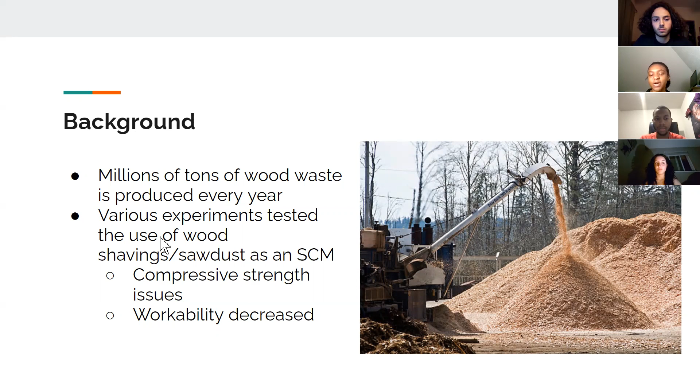Before conducting any tests ourselves, we familiarized ourselves with the experiments other people did to determine how wood would affect the properties of the concrete. The main issues that resulted were that the wood decreased workability and replacements greater than 8% led to compressive strength issues. All of this research led to our final hypothesis that the 5% wood mix would be more durable but weaker and less workable than a control mix without wooden fine aggregates.

All right, I think the audience heard enough of my voice, so I'll pass it to Sean to talk about our materials and testing methods.

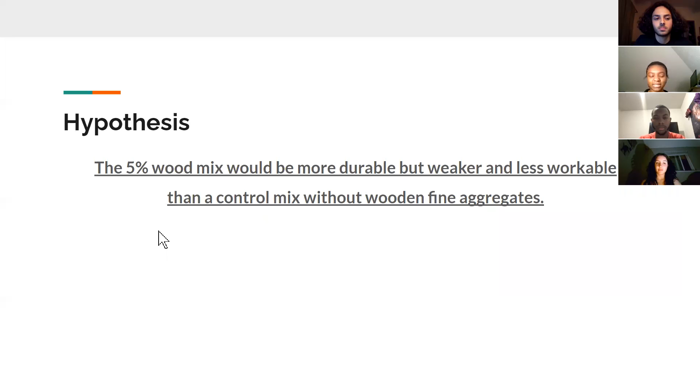So for our experiment, we created two concrete mixes, mix one, our control mix, and mix two. The ingredients for mix one were Portland cement or Quikrete number 57 pea gravel, which was the coarse aggregate, concrete sand, which was the fine aggregate, and water. The ingredients for mix two were the same as mix one, except for the addition of wood shavings.

After gathering all the ingredients, we mixed them together until we had a homogeneous mix. And then we performed the slump test, which looks at the workability of the mix. And we performed the pressure method air content test, which looks at the entrained air in the mix. Both mixes were then put into 3 4x8 cylinder molds to set and cure for a total of 7 days.

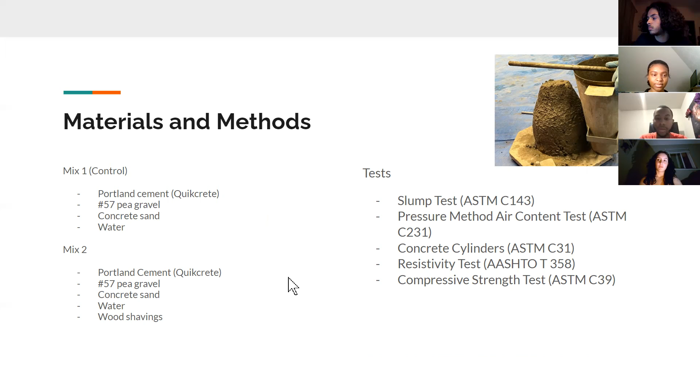After retrieving the cylinders, we performed the last two tests, the resistivity test, which looks at the durability of concrete with respect to corrosion, and the compressive strength test, which looks at the overall strength of the concrete. And here is a picture of us preparing the cylinders for the resistivity test. As you can see in the picture, we wrap the cylinders in damp paper towels in order to keep the surface more moist before starting the test.

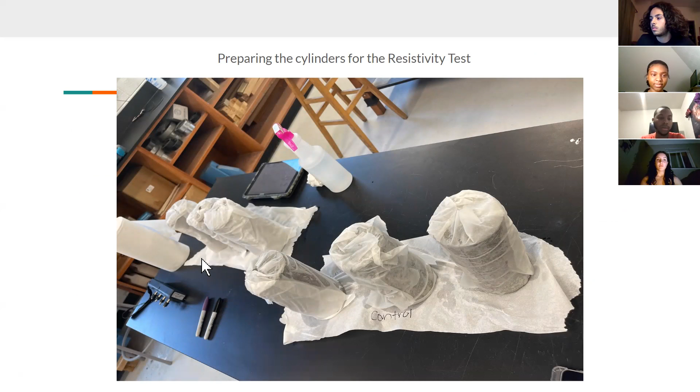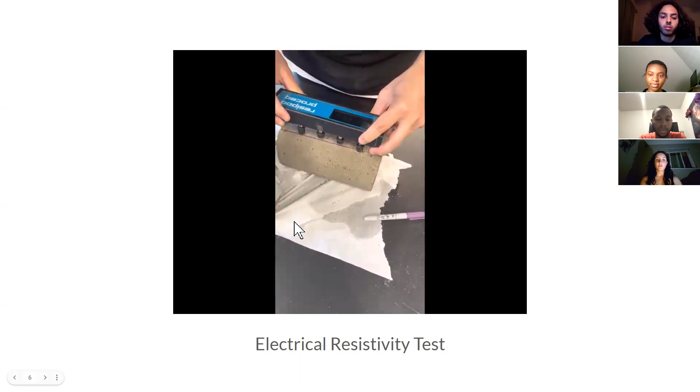So here is a video of the electrical resistivity tests that we conducted. As you can see, the prongs of the resistivity meter are lined up with the straight quadrant lines that were drawn on the cylinder. This allowed us to measure 4 different points on the cylinder.

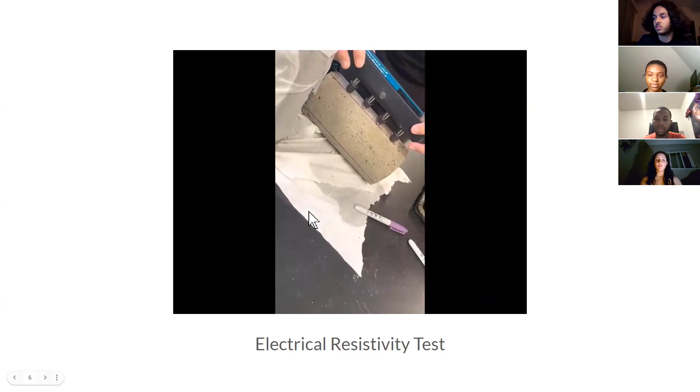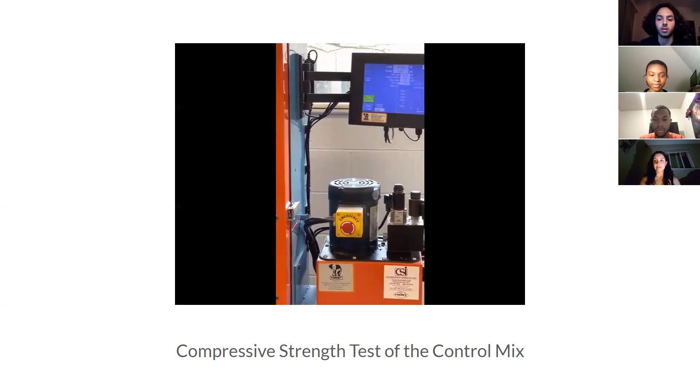And this is a video of the compressive strength tests for the control mix. In this video, the compression machine is gradually increasing the load on the cylinder until it reaches a max load right before fracture. About 2/3 of the way through this video, you'd see right about now that the cylinder starts to crack at its max load, and you can see that it's broken in multiple areas.

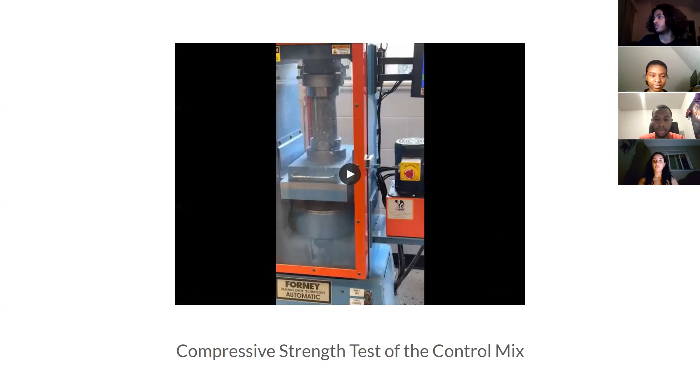All right, Alyssa, can you tell us more about the results of the experiment? Yes, I can. So for the results of the experiment, as you can see in the figure on the right, the control mix samples had a greater resistivity than the 5% wood mix samples. This alludes to that the 5% wood mixture was more resistant to conductivity, and therefore that alluded to as well that it had a higher durability.

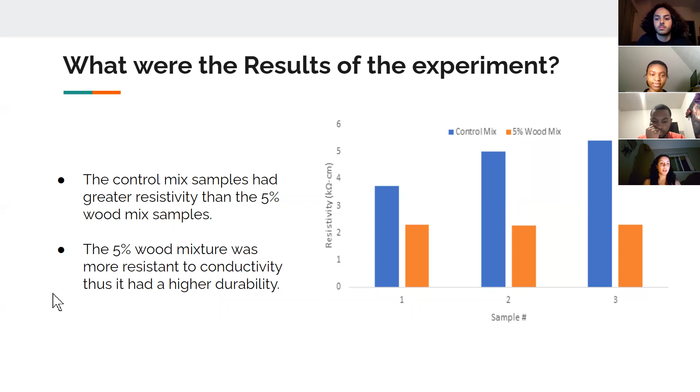In the next slide, you can see some photos of what the cylinders looked like post-compression. So for the first two that you see on the left, the 5% mixture showed a certain degree of post-compression fractures. And then for this last photo on the right, the control cylinder post-compression, you can see a lot of the voids that we noticed within the cylinder before the compression, and then the fracture point at the bottom.

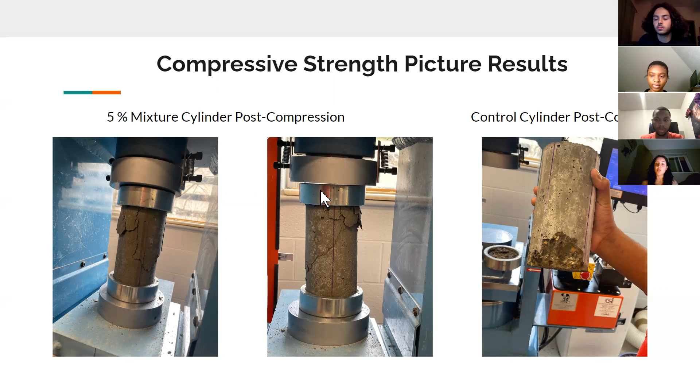All right, and how did the results compare to our hypothesis? Yeah, so as per the hypothesis, the 5% wood mix was indeed more durable, but less workable than the control mix without the wooden fine aggregates. And the 5% wood mix was too unworkable and required more water.

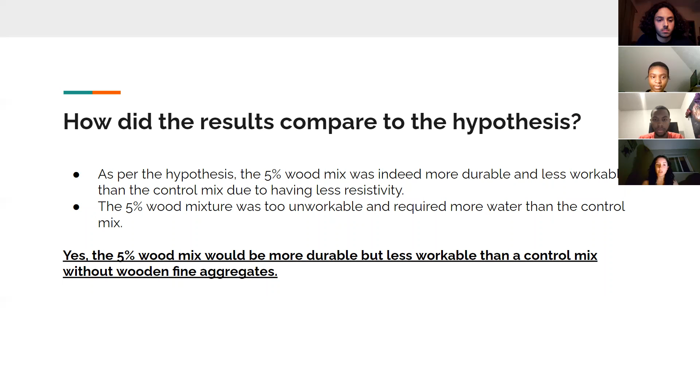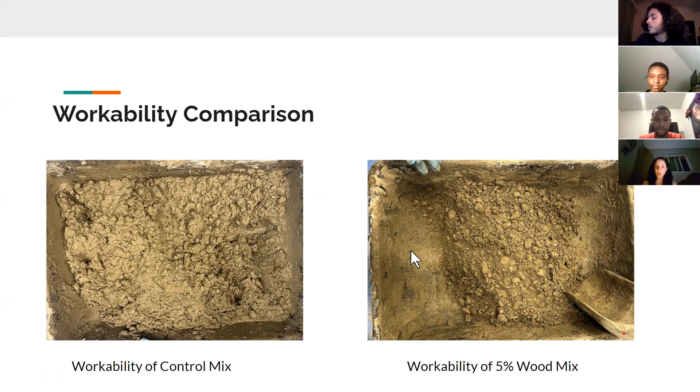And you could see this in the next slide when you compare the workability of the control mix and the 5% wood mix. If you can scroll to the next one. Yeah, so the one on the left, it was pretty workable and, you know, needed a bit more mixing in terms of, in retrospect, the voids that we saw in the cylinders, but the one on the right without the water added for the 5% wood mix, it was completely unworkable. It was hard to kind of get it to coagulate fully.

Sanjay, can you tell us more about what our results tell us? Yeah, so our results, we looked at workability, and the loss of workability in the wood mix is mainly due to the increase in friction between the wood particles, rocks, and sand. This resistance is created when acting surfaces are rubbing up against each other, which then cause the mixture to lose its flowiness. We then looked at the electrical resistivity test, and it relates how easily ions can move around inside the concrete.

And this lower resistivity in the 5% wood mix meant that the ions struggled to move around in the mixture, making it more durable. Both samples, in fact, allowed a high penetrability level of chloride ions, but the 5% wood mixture was slightly less than the base mix. Since the ions were not able to move as freely in the wood mixture, the concrete cylinder showed an increased resistivity, which directly correlates to an increased durability.

When we talk about durability, it means that this concrete cylinder will be able to perform and withhold the properties of the design over a longer period of time and under harsher conditions. Our experiment results, we were limited on time, and we also struggled to get the mix weights in order. So it was tough to get a third mixture or a fourth mixture with higher wood percentages into molds.

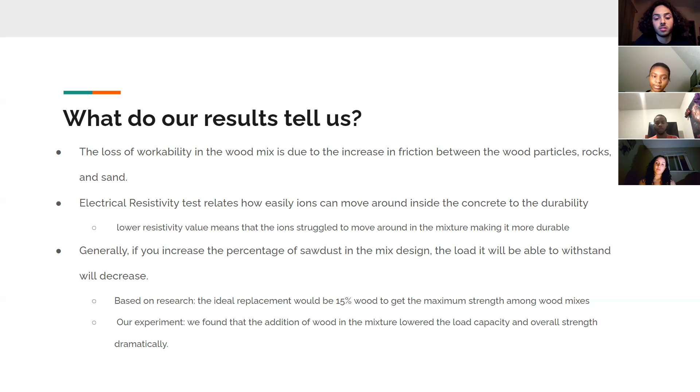It would have been nice to test a 2.5, 5, 7.5, and 10% mix to determine which would perform the best. According to some research that our group did, the ideal replacement would be 15% wood to get maximum strength among the wood mixes, but less than an 8% addition of wood would be the most ideal for retaining all the important properties of the mix, and that would ensure an increase in durability, but decreased workability and compressive strength.

And how can we apply everything that we learned to the construction world? So potential mass use of wood additives in our concrete mix relies on a few factors. So using wood as a substitute for a fine aggregate will limit the need for excessive extraction of natural rocks. Using recycled aggregate would also cost a bit more, but it would lessen the mass transportation of aggregates, and this would lessen the environmental impact.

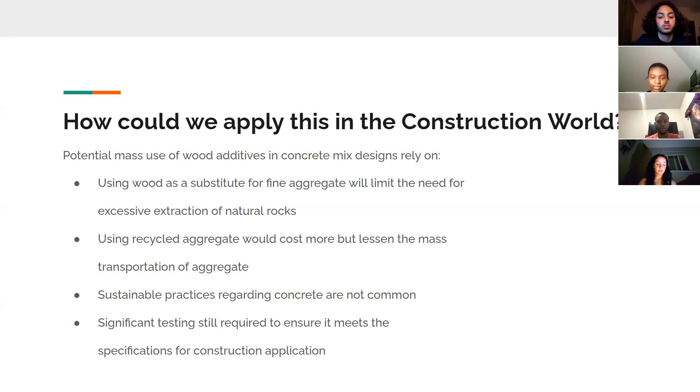Sustainable practices aren't fairly common, but there is still significant testing required to ensure that these mixes would meet specifications for construction application. Further testing to be done is that we could potentially replace the fine aggregate and cement at the same time. We could also evaluate how wood shaving size and shape change the concrete performance. And lastly, looking at adjusting wood properties such as humidity, moisture, the type of tree, and treatment done to see the effects on the concrete mixture.